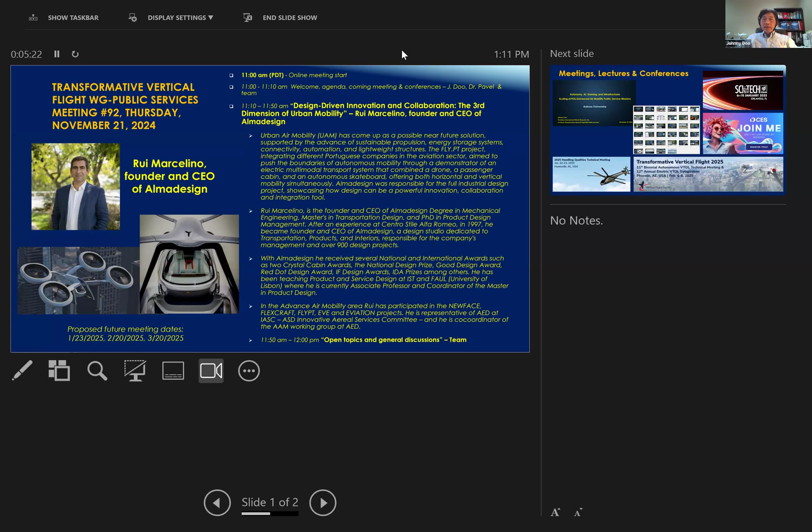Thank you, Johnny. Okay, I'm unsharing. Okay, you can share your presentation now. Okay, let me try to see if I do it right. Always scary, this moment. Okay, so here we are, let me do this, the sharing. Okay, is it working? Yes, yes, yeah, good. So, can you see it? Yeah, we can.

Great. So, with no further ado, Johnny, first of all, thank you so much for the invitation. It's a big pleasure, my pleasure, to be here with you this evening—which now for us is already evening. Big pleasure for us to be here with you. Not only you, Johnny, I know I've been with Mike Hirschberg a couple of times, so it's so nice to see him again, and it's always a pleasure for me. Also, it's part of my role in the society to share the things that we have done, especially in an area where personally and the company is so involved.

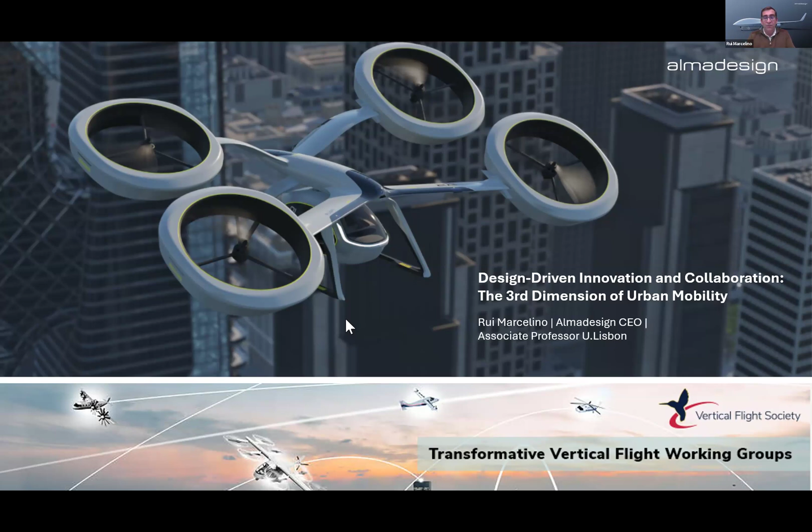So, as you said, I take most of my time running my studio, which is named Almadesign. I'm also a professor at University of Lisbon in my spare time, if I have some, and it's where I like to share knowledge with future students, and sometimes where I get future people that work with me. The theme of my presentation is design-driven innovation and collaboration, and it's about how design and design thinking methodologies can contribute to the multidisciplinary design of innovative aircraft projects.

So first of all, as usual, and also for you to understand the context of this project, a few words about Almadesign.

Almadesign has some experience in the past in designing sustainable products. We have been designing products for the mobility area and other areas for over 27 years, and of course, one of the main areas we've been involved in is the aeronautic area.

I'm sharing a slide with you. Only this year, we were involved in about 20 something projects. These include competitive projects, like I can mention with not disguisable pride, the all TAP Portugal interiors of the full fleet, and they are flying today.

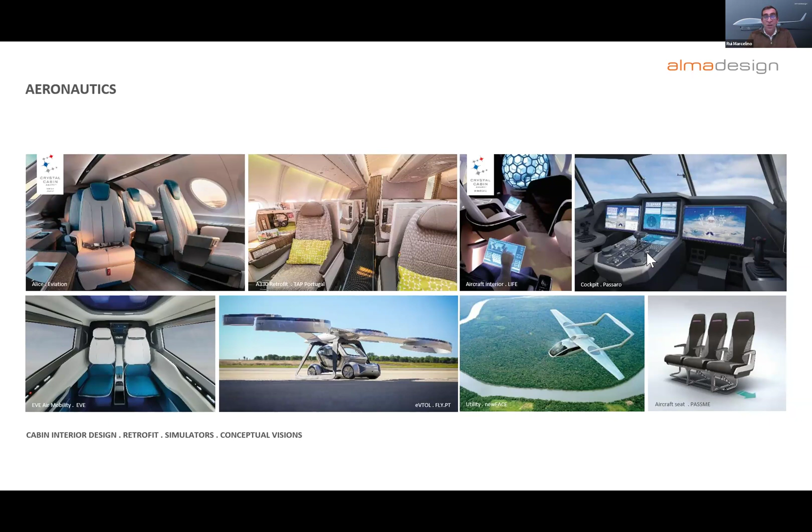But we are also very passionate about being involved in new projects and concepts. One of them, which you probably know, related with the area, is the fully electric Alice aircraft launched by Eviation, where we were involved in the interior design from concept to mock-up construction.

The pictures you see on the left show the design award interior that we created for them, and on the right, a picture of the real cabin and cockpit we created. We designed not only the taxi version, but all cabin interior variants, from executive to cargo and multi-purpose versions.

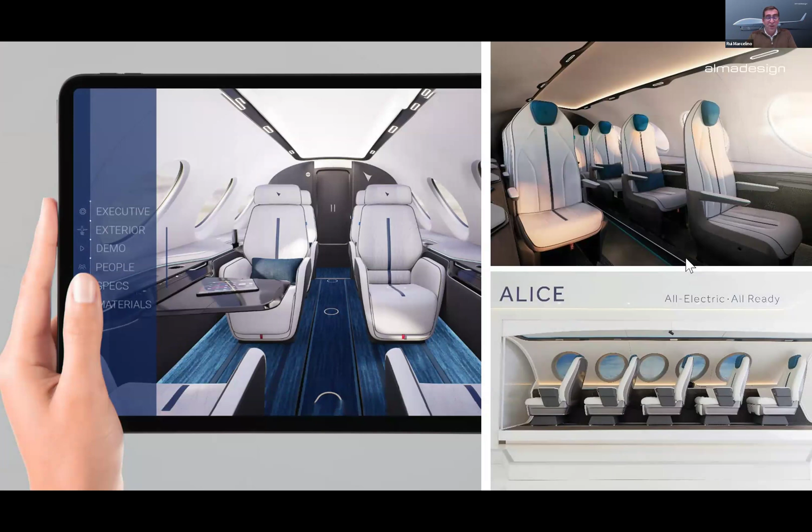This addresses the challenges of people flying in this future, more sustainable, quieter, and cleaner aircraft. My first cue about design, besides industrial design, is that design also helps our clients communicate the projects. We use the same 3D files we use for industrial design to help clients generate virtual showrooms and digital mock-ups, so they could share with society what they were doing and the aim of the project.

This is one of the things I'd like to communicate today: this role of design in helping to communicate what the product is about.

Another project very much related with the area is EVE Air Mobility, where we were involved in the full interior design, and also in some aspects of the exterior look and feel.

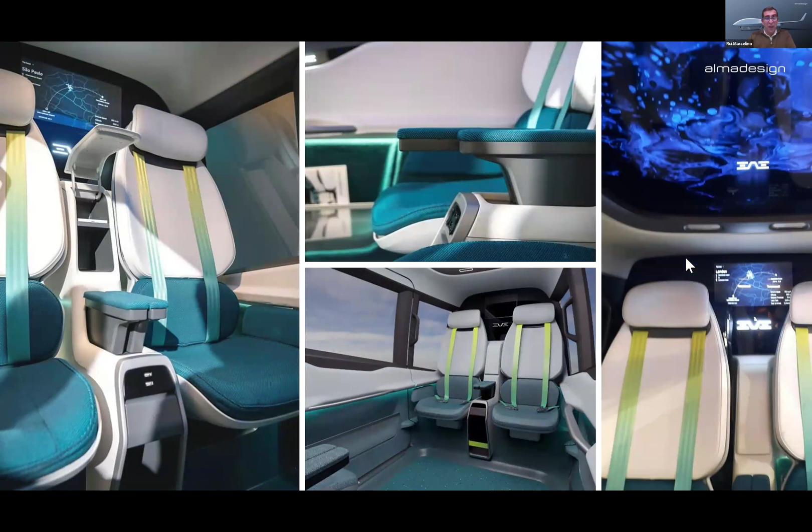We created it from sketches, taking into consideration the general dimensions of the aircraft, until building the full prototype, which is visitable and is going around exhibitions around the world, where you can sit, try, and have this user experience, using interactive panels to explore how you can calm down passengers flying with something they've never used before.

And how can this be a seamless experience in their travel path. Besides that, because we like to work on cooperation projects, we have been involved in Clean Aviation - you probably know the program in Europe. One of the projects is HERA, run by Airbus and Leonardo with a lot of partners, for hybrid electric aircraft.

There are a lot of competitive projects we've been involved in lately, which I won't bore you with now. But I'd like to share that our collaboration is not only on aircraft design, so we don't like to call ourselves aircraft interior designers.

We are mostly concerned with mobility systems. So we work from aircraft to buses, trains, and many different systems. You can see that all these systems are related and correlated in the passenger experience.

Since we are designers, the experience is always focused on the passenger, and I know with a mechanical engineering background, not so much on the technology. So we make the bridge between what passengers need and what technology can give, and the mobility system is fully approached.

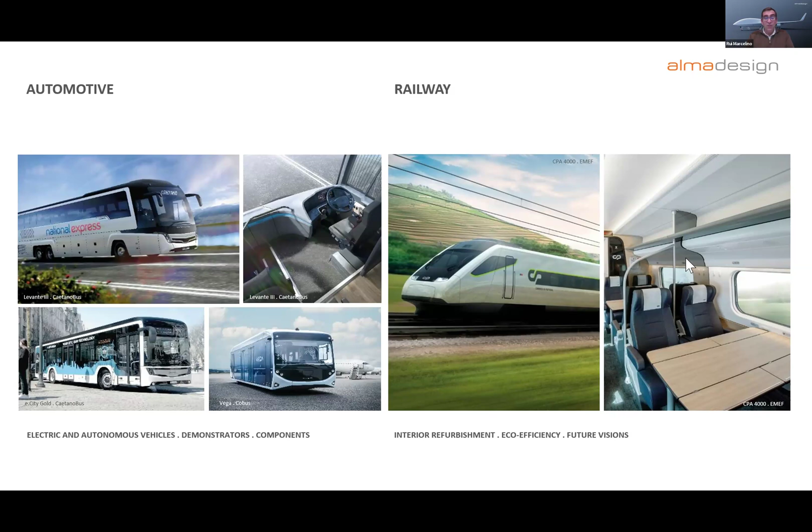One of our latest projects is the new electric airport bus, the Cobus. You've probably been in one Cobus at least once in your life, because they have 70% of the share in the world, and the last 3 generations were designed at our studio. This is part of the decarbonization of the full aeronautic system.

Besides the nautic area, which I won't develop since we're related with mobility systems, we've been involved in things like energy storage and supply systems. The holistic approach to vehicle infrastructure is also part of our core business.

But as I promised, today I'm going to focus especially on a specific project called, as Johnny just mentioned, FlyPT. It's a project on urban air mobility.

I like to call it urban and intra-urban air mobility, supported by the recent advances in technology and systems.

As vice president of the Portuguese Aeronautic Space and Defense Association, what I like most to do is build consortia with my partners at the association, creating consortia of companies and R&D institutions to work on these future challenges of mobility, integrating the passenger challenge from horizontal to vertical mobility using advanced air mobility.

So we created this concept, which isn't 100% new - nothing is 100% new in the world - that simultaneously combines an autonomous aerial vehicle, which we call a drone, though the car could be considered a drone itself, an autonomous automotive vehicle for road mobility, which we call the skate, and a modular cabin attached to both vehicles. These three parts are the systems that integrate vertical with horizontal mobility.

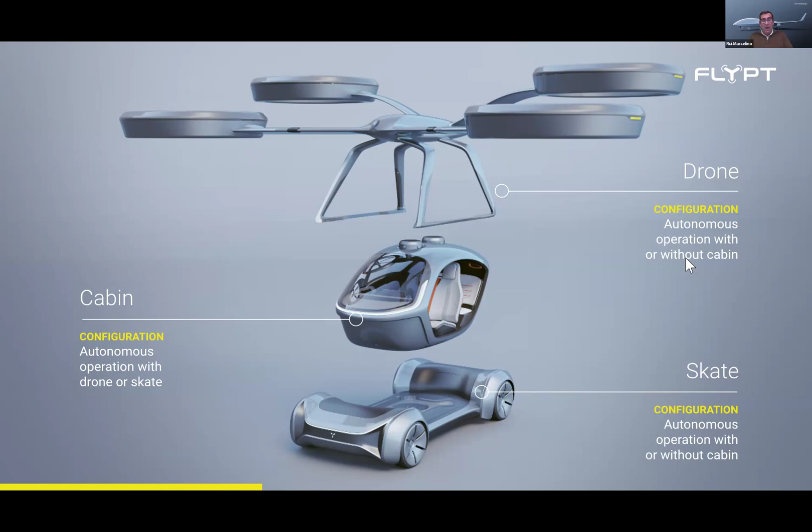Another very interesting aspect is that since the cabin used is the same, there's no discontinuity in the trip for the passenger. We believe this is also one of the key factors of this project.

This is the scheme we used initially to organize the project into several work packages - you've probably seen similar things in your own projects. Almadesign was responsible especially for the cabin module, since it was most related to the passenger itself, but as industrial designers, we ended up integrating the full project industrial design.

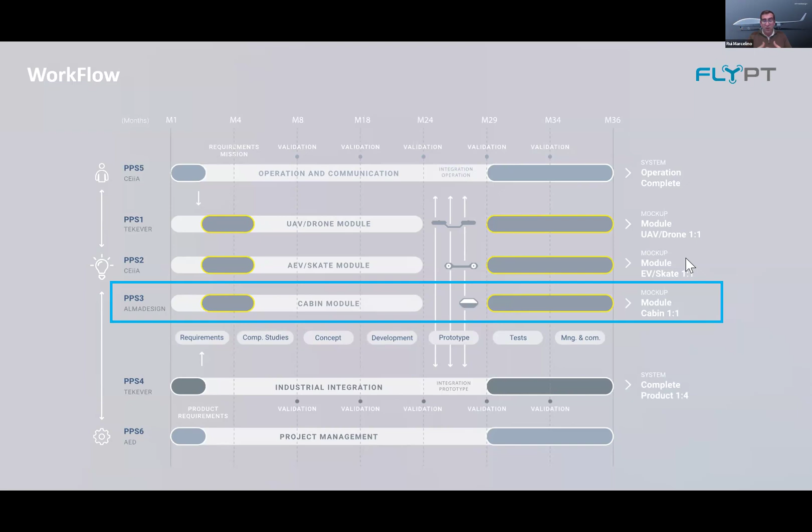From our previous experience in competitive projects, you really need to bridge complex projects between many specialties, from the technical side to the market drivers, which are frequently separated, and people on these two sides have different mindsets. We believe design helps make these conversions, so we use our design methodologies to create convergence between the different stakeholders early in the process.

We use three tools that I'll explain briefly - three design methods. The first was the morphological table, the second was sketching, which is probably more understandable, and the third was what we call a concept selection matrix.

Just a short example of each - and of course it has to be visual, because whatever we do here at Alma has to be somehow visual. We created this big canvas where all the teams - and the companies involved include engineering companies, companies specialized in aerodynamics, others in structures, others in injection molding, others in power storage systems - put together different solutions morphologically, in terms of shape, addressing these three parts of the concept before we knew the final shape.

The morphological table was used for all the teams to express visually together what different options we could have. At this stage - and this is something I find very important - there's no rule saying you cannot do that, or this will have problems. We're just mapping, and when you map, you get a full understanding of how things can connect visually and how you can choose different options to select the best solution.

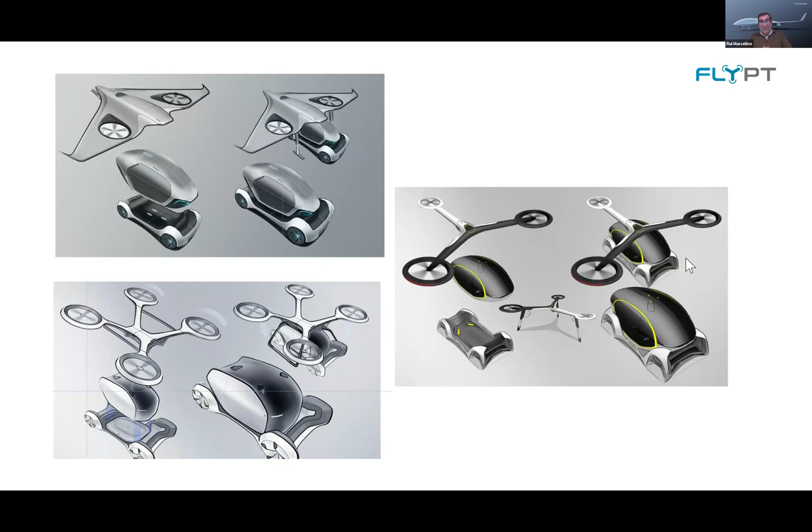In the end, we also did the interior design because this is about the continuity of the mobility process. It should be a place where people feel as safe and as comfortable flying as traveling in road congestion. So we had to bring our knowledge from road transportation and air transportation into different concepts.

Then we got the whole team together to discuss the sketches, images, and different ideas, and put everybody to evaluate. Now, that's where I make a stop, because when you look at sketches and things created by designers, some people say 'I like this, I don't like that.' That's something at academic level I almost never use, because this isn't supposed to be just for me, and there are so many other things in a drawing besides aesthetics.

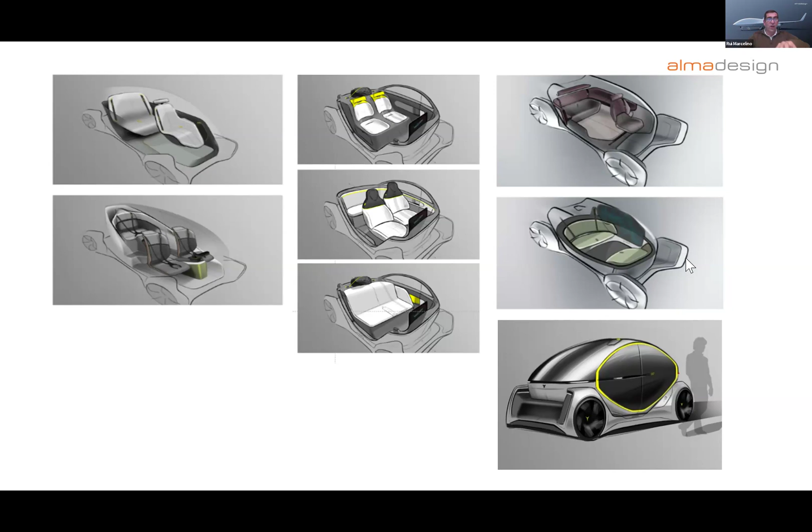That's why we use a third tool to put people to work over the ideas we've integrated through sketches. This is what we call a concept selection matrix. We put all the pictures of the sketches we generated and selected about 6 or 7 best solutions.

We evaluated them as a whole team, considering the design part - aesthetics, comfort, perceived safety, passenger interfaces, and so on - but also the construction part: structure, manufacturing, costs, assembly. Many people in the group have very different knowledge about these topics, and we put everybody to evaluate the strengths and weaknesses of each design option based on different criteria.

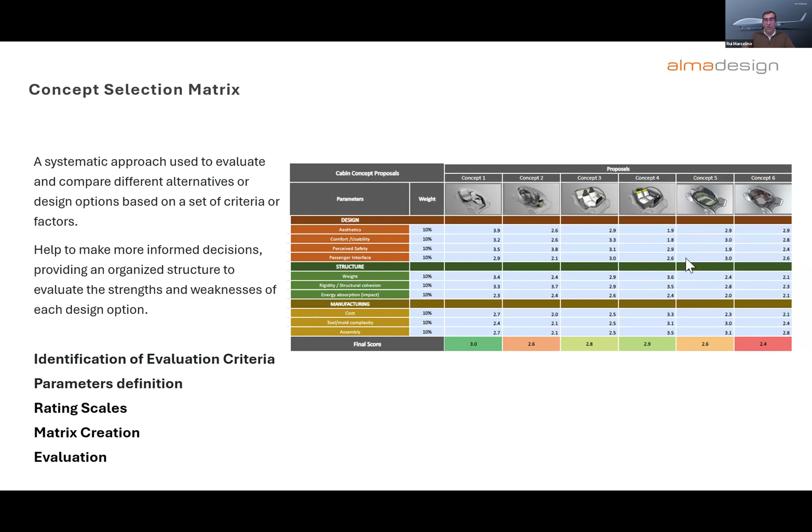In the end, at this concept generation stage, we use three methods together: on one side, the morphological table to integrate stakeholders' suggestions from the market, and from technical requirements on the other side; we use sketches and images to visualize and integrate different viable concepts; and we use the selection matrices.

This allows a voting base where everybody feels they are participating in the process. So the project is also theirs, and they are part of the solution - they don't create groups that say 'we are going to create problems because this isn't our problem.'

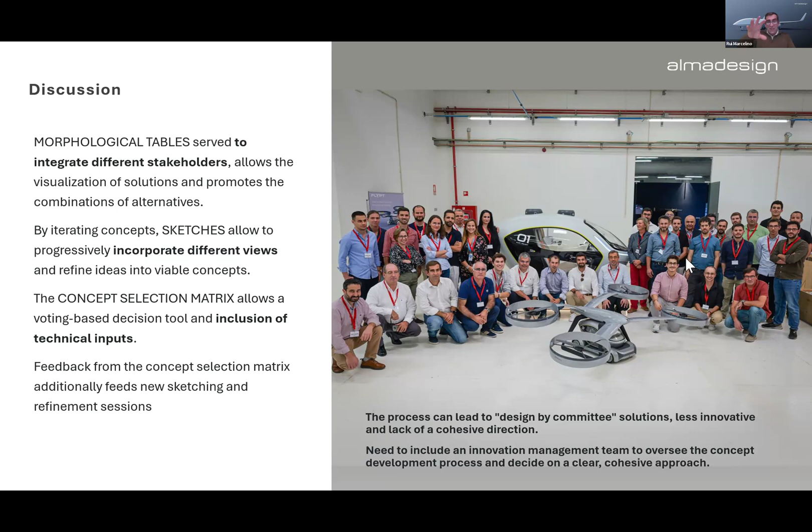Of course, there is always the risk of a design-by-committee solution, but it's very important to have a group of 4 or 5 management team members from different areas involved, to help make an informed decision in the end. From this, we picked the final solution.

And that is the time we proceed to the 3D model. But when we advance to the 3D model, everybody already knew what was the vision of what you would get in the end. So it's much smoother the way the different actors share files and interact, because they understand the full picture of the problem instead of just knowing electronics, aerodynamics, or energy storage.

They know how it will look and feel in the end. And for us, this is really one of the most important parts: convergence into the same vision.

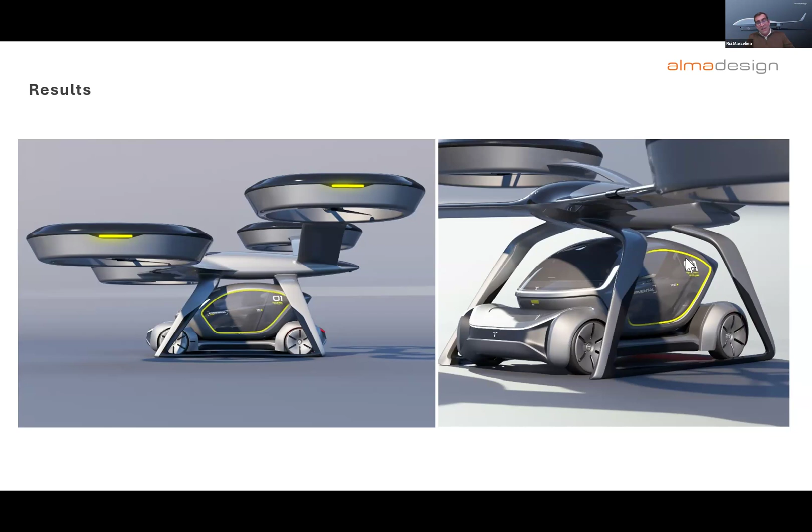From this, as we always do at Alma, we make it tangible. So we proceed with the 3D model, creating a 1:4 scale complete model and a complete 1:1 scale model to test ergonomics, entrance, interior systems, and so on. The seats you see here are full scale, mostly built using 3D printing methodologies.

Even the textiles have 3D printed parts. And the 1:4 scale model was used for tests in the field and for flying tests, also for the drone.

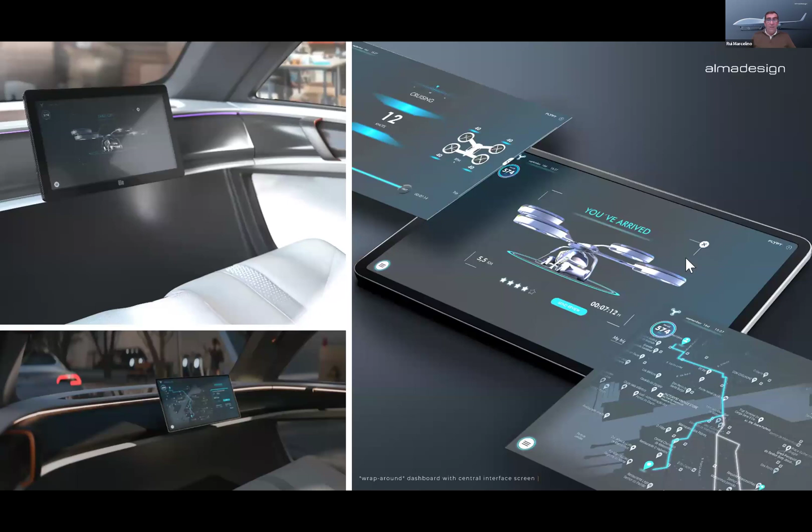For design people, the product is not the only part of the solution. Even the system that interacts with you is part of the experience. So even the interfaces that you create with users, whether pilots or passengers, have to be very intuitive. Since we were talking about a transport system with no pilots, we can develop this topic later. We use the most intuitive interface that you could have.

So we have developed the full visual user experience until the final mock-up that you could see here in this image. Summing up, like some previous projects we have worked together, FlyPT included these three design methods to specify, to generate, and to select solutions.

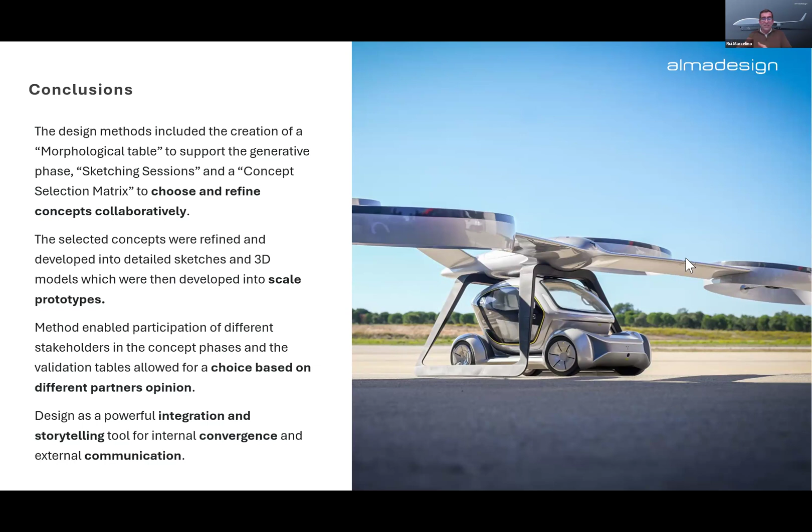And the selected solution was developed successfully into a 3D model and then into building a prototype. These methods, in our opinion, proved to be a successful tool when working with different stakeholders and specialities, even different cultures, because it's a common language that everybody understands.

Finally, because the only way to succeed, well, the only way I've been doing projects in the last 27 years, is through collaboration. And we believe that these design methods can be used in the development of new aircraft designs, making new products.

Of course, aircraft design is our mostly used area, but it's about developing new projects and making the right bridge between different technologies and even different market trends and market needs. From operators to passengers, from engineers to maintenance people, you can create a common language and a common vision from early stages through design methods.

Finally, and I'm arriving to the end, besides the technical and market integration, design also helps to communicate the story behind the project, which creates a bigger involvement of the project members and of society. It's not the first time that some clients asked us to tell a story of their products.

And when you visualize the story of the product, their stakeholders and their community of interest say for the first time, now I understand what you're doing, now I understand what is the scope of your project. It's not that the project is not a good solution, it's just that you need good storytelling.

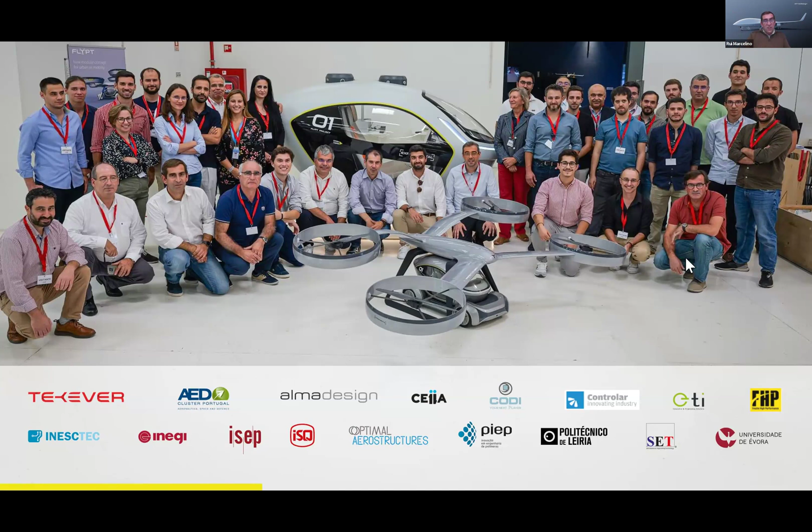So talking about storytelling, we created, with all the team, a short story that could be disseminated through the internet, through all channels, social networks. We have created a small 2.5 minute video, which I'll share with you now, if the sound goes okay, which tells a little bit of the full story of the project.

I hope the sound goes well. I'm going to try it again. Do you have the sound? Yes, the sound is good.

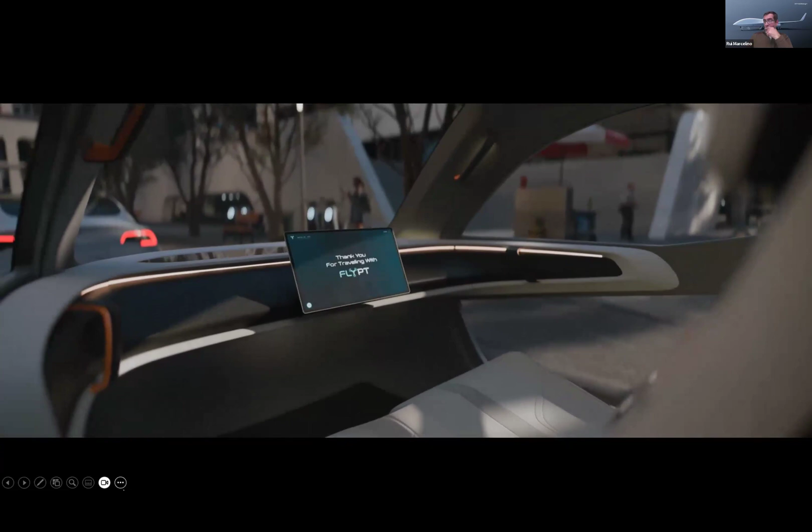So this is mainly the story, and I think that the images are much more explicit than all the speech I could do about the project.

And of course, I think that my two hats, three hats, my role at Almadesign and at university is a little bit this: to understand how the design process and your process can help projects, especially innovative projects with so much uncertainty, to succeed.

And of course, what we want here at the team is always to become better designers, like Dubberly, an author I've studied for a long time, says: why do we care so much about design process? Because we want to become better designers and generate nicer things for the world, and generate a better world than the one we live in.

So that's basically it. Johnny, I think we discussed for about 30 minutes, and I didn't overrun too much. Thank you also for your attention.

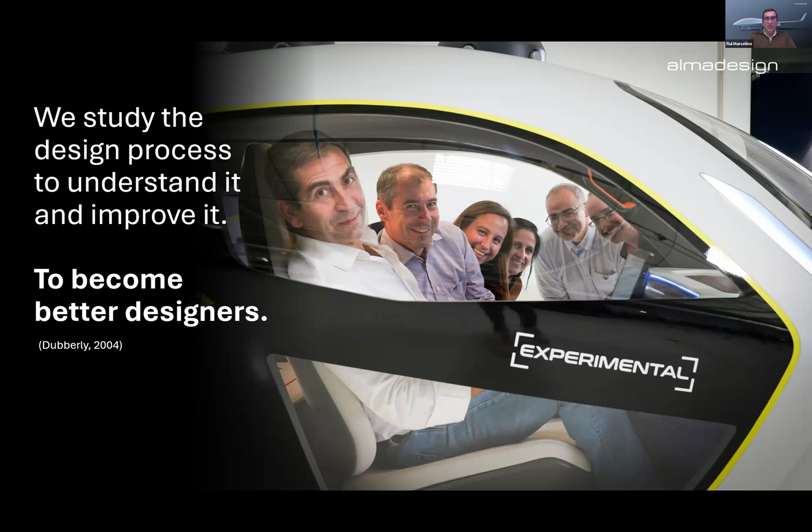Thank you very much. Thank you so much. I do have one question as I was watching this particular configuration design.

If we don't put people in the cab, is it possible for this vehicle to fly with the base, the ground portion, and to deploy into disaster areas, then ferry people in and out, with several ground-based units running around delivering food, water, medicine? Just curious, is that even a possibility?

That's a terrific question, and I'll tell you why. Before we did this project, we developed the same concept, which had no cart and a movable cabin with small movable parts, which you could move into a field where it's dropped. Our scope at the time was called Flexcraft, and we had Embraer involved in that project. It was exactly what you were saying, a flying wing, because the scope was to have a bit more range than the typical rotor configuration.

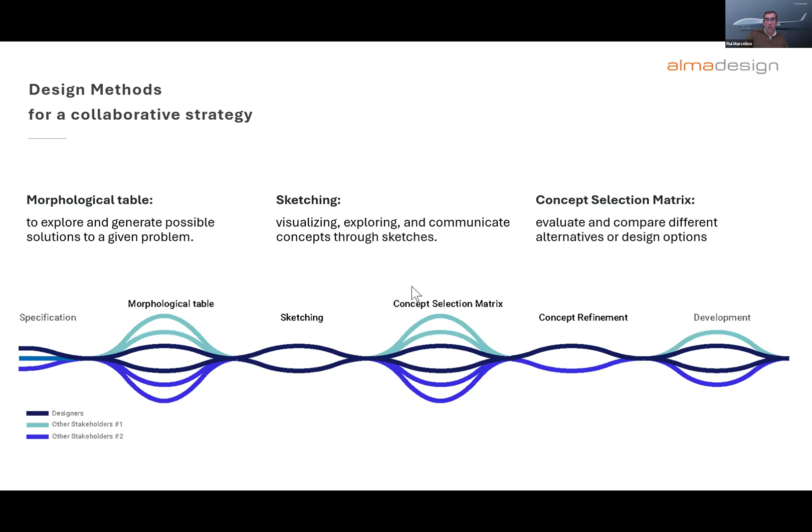Yeah, there is a major, let's say, we work in a consortium, but there is a major integrator, which you probably have heard about, they are called Tekever. I have them in a previous slide. And Tekever is a drone manufacturer that builds, well, they don't have such a big drone, but they have drones up to 7-8 meters span in wings. So they are aiming to go, let's say, bigger, right? I think I have their name here. Yeah, okay, it's these guys. Oh, yes. Okay, good. Yeah, thank you. I missed that. Thanks. No worries.

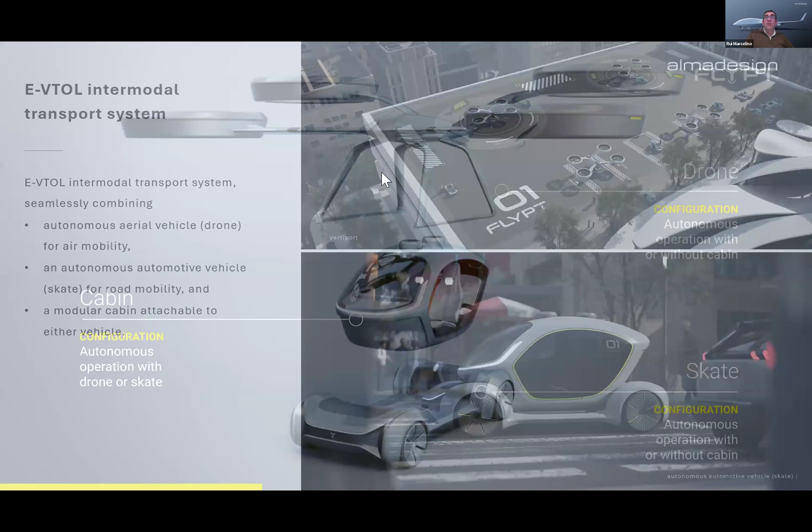Really cool stuff. Thank you, Ben. And Greg, by the way, this slide, for me, it's what I mean with divergence, right? So there's no one there saying, you can't do that. Yeah, this is almost like a little menu of options, right? Or capabilities. When I saw that, I thought, a lot of design elements in each one of those. Very interesting. Very cool. And it's visual. So even people who don't understand anything can look at it and imagine the guy from production that doesn't understand anything about aerodynamics say, well, but this would be easier to produce.

So he understands what we are showing. It's part of that aesthetics across the board of all the components. Pick and choose what you want. And I have this motto, which probably you have in your companies, which is, since I was at university doing that job as aeronautic design, which is usually an aircraft that looks good, flies well. And you know that, right? Right.

Well, Johnny, we're glad to see you back. Yeah, I was dropped out for a second. Sorry about that. We were able to carry on without you. Yeah, thank you. You're good.

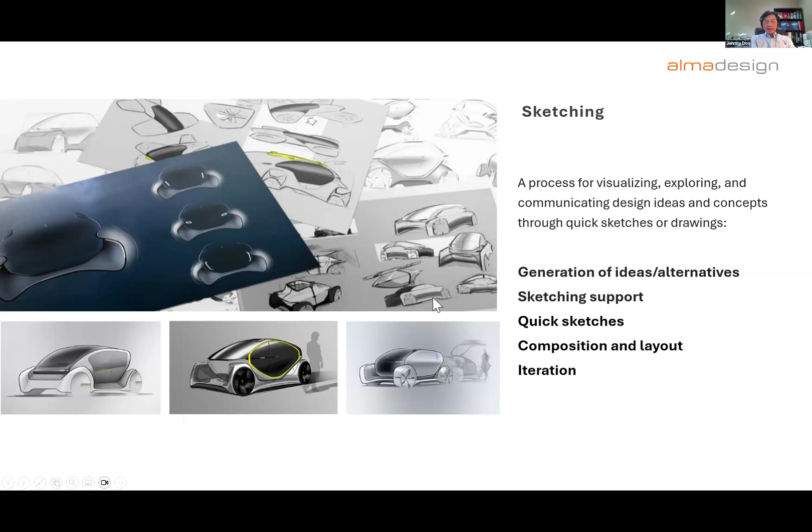Oh, wait a minute, Greg has one more question. Okay, come on Greg, I won't keep you all very long. No, I don't have a question. No, I was just, to be honest, I could speak about this topic all evening.

Yeah, Tito. Yes, thank you so much. Yeah, I really enjoyed it. May I leave a message for you?

So the most important thing here at Alma, I have 15 guys there playing, guys and women playing guitar and waiting for me to go to dinner. And it's a lovely place, 15 minutes from Lisbon downtown. If you ever are around Lisbon, I'll be delighted to welcome you here at Alma, to see scale models of things we have done in the past, and to meet the guys and the team, which is the best part of my team.